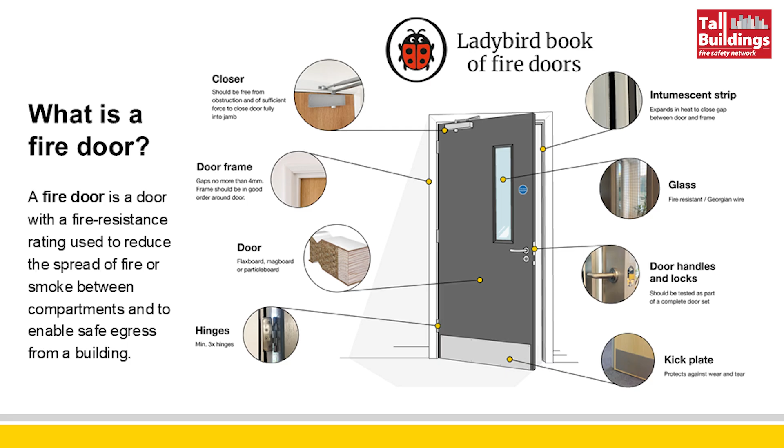However, I think we can probably also all agree that as an industry, we've got a very long way to go when it comes to making fire doors, which can often feel heavy and cumbersome to use, feel less like a barrier or a hurdle that needs to be overcome, especially within the context of social housing.

So as I say, non-functioning door closers, specifically on flat entrance doors, is a big problem within the social housing sector. And many of our customers have told us that between 30 and 45% of their housing stock suffer from these kinds of issues. And with door closers often being fitted on the internal face of the door or over the resident's threshold, it can often be a difficult problem to recognise and remedy.

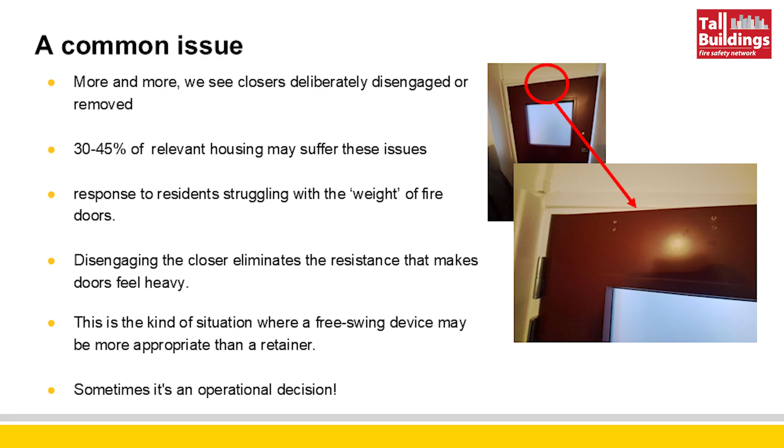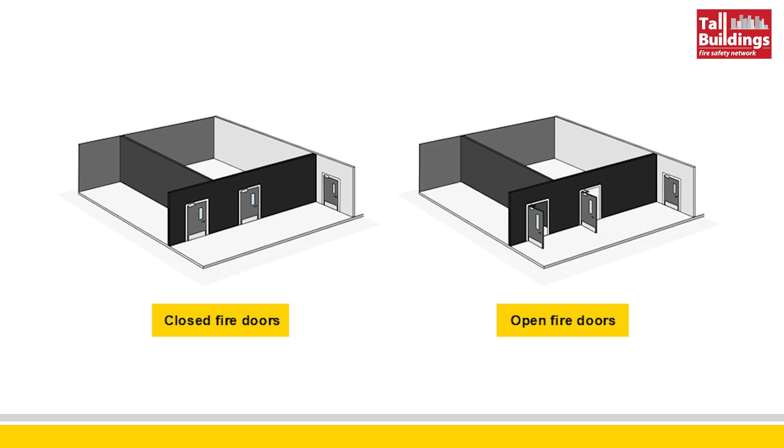So here's the good news. It's rarely a deliberate or malicious attempt to undermine sound fire safety strategy. Where residents take this kind of action, it's by and large not done out of malice, they're just trying to make their own lives easier. It is instead a symptom of a wider problem, and that is how heavy fire doors can appear.

And it could be easy to assume that it's just the elderly or people with mobility impairments that struggle with these kinds of problems, but fire doors don't discriminate. Fire doors are equal opportunity bullies. The bad news is that we can't place the blame for this problem solely on the shoulders of residents.

As Peter Apps identified in his book Show Me the Bodies, which explored the many failings that led to the Grenfell disaster, operational decisions and poor maintenance led to 77 out of 120 door closers in the block being non-functional. Despite many complaints from residents, despite the issues being identified in risk assessments, despite even an enforcement notice from London Fire Brigade, nothing was done to deal with the problem.

And whilst non-functioning door closers weren't the only problem at Grenfell, they certainly played a very big part in the internal fire spread.

And that is the problem, isn't it? A fire door that cannot self-close is no longer really a fire door, is it? It's just a big bit of wood flapping about in our compartmentation lines.

So as we saw in the Grenfell tragedy or in the fire at Twin Parks in the Bronx, New York City, where 17 people died in a stairwell after a fire spread from an apartment with a door that lacked a self-closing mechanism, doors not closing when they need to can be a major factor in fire spread. It's a critical issue in preventing fires from moving through a building.

It's likely that where we see or are made aware of deliberately disengaged door closers, a free swing device could be a better solution than a standard door closer. So I'm going to assume that most of the audience have an awareness of free swing devices. However, as BS 7273 Part 4, which we'll come on to later, makes little distinction between free swing and hold open devices, it's important to understand the difference, especially when considering how you want different doors in different types of building to perform.

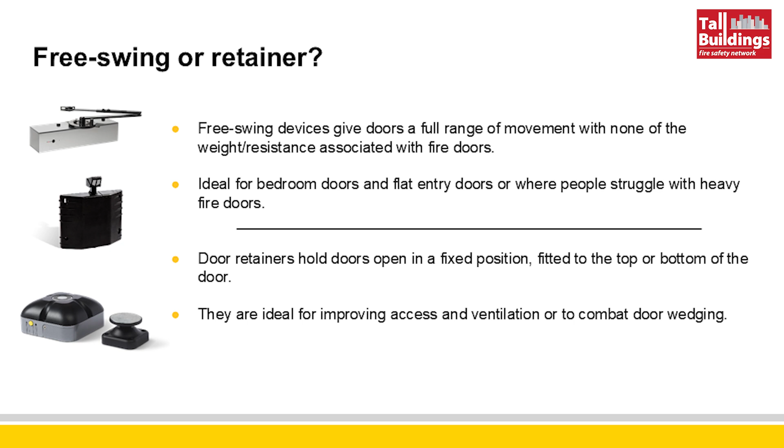However, in those circumstances where we're looking at bedroom doors in care homes or flat entrance doors in social housing, a hold open device is often unsuitable. In those instances, all we want is for a door to have a full range of movement on its hinges without any of the weight or resistance that we associate with automatic door closers.

So while some free swing devices do also have a hold open function, the most desirable feature is that doors fitted with these products can be opened and closed with little to no effort at all. And when the device receives the relevant fire signals, the free swing function is disengaged and the built-in closing mechanism shuts the door.

And of course, the method of actuation for free swing devices, the way in which the release mechanism is triggered, will vary depending on the nature of the building, the type of alarm system used, results of risk assessments, and of course, budgetary considerations. Many people still see fully cabled or hardwired systems as the only way to get complete compliance with the relevant guidance.

But with developments in technology, specifically radio frequency systems, this might not be the only way to achieve the desired level of compliance. By modern standards, many view the hardwiring process as a time-consuming, expensive and messy process. And it can have huge negative impact on occupants of a premises where sites are live or occupied by large amounts of people.

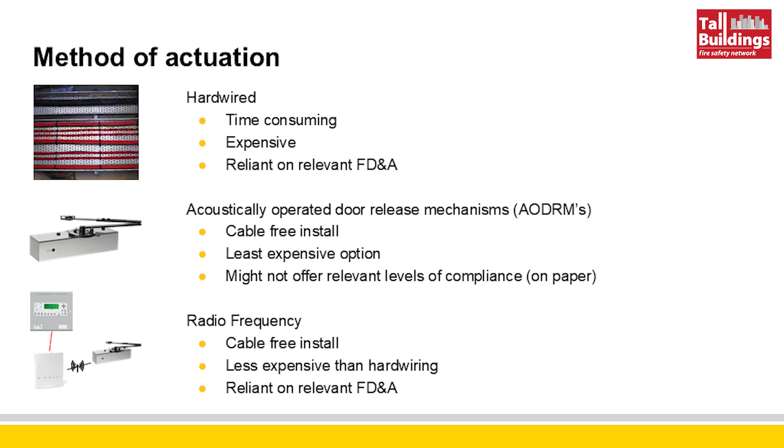Acoustically operated door release mechanisms, or AODRMs, rely on an audible signal, usually around 65 decibels, to release the mechanism. With improvements in sound filtering technology, these devices have become more reliable and offer a quick, cost-effective, easy solution. However, when we look at the guidance available, specifically in BS 7273 Part 4, these types of acoustic device might not offer the correct level of compliance in certain situations.

And then we have radio frequency systems. These bridge the gap beautifully between fully cabled and cable-free systems, operated via a hardwired radio transmitter, which can be integrated with relevant fire detection to form part of a critical system. Radio frequency devices offer all the benefits of a cable-free installation, whilst offering high levels of compliance compared to acoustic devices. Like fully cabled systems, radio frequency devices would be reliant on relevant levels of automatic fire detection being available.

So, free swing devices, they seem to be a reasonable way to deal with the symptoms that can cause residents to take matters into their own hands. But with the guidance saying that fire doors need to meet a specific level of compliance, it's tough, sometimes nearly impossible, especially in certain types of social housing, to achieve that level of compliance. And trying to reconcile guidance from British standards with the needs of the people we're trying to protect can feel like navigating a very tangled web of compliance. So does the fire industry know how to handle this paradox?

Well, before we go any further, I want to give you a very quick overview, and it will be a very quick overview, of BS 7273 Part 4. It's known for being a very tough standard to comply with, even in the best of circumstances. We'll also look at the type of automatic fire detection that's used commonly in social housing and how that can affect the type of solutions that you can use. However, there's a couple of key points that I need to cover first.

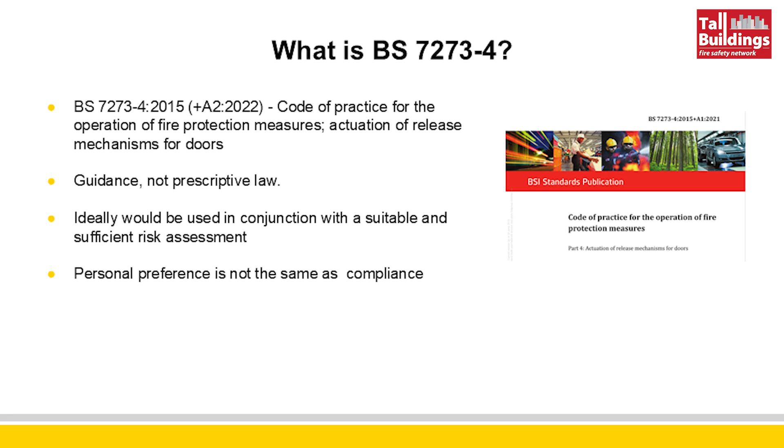But we do need to recognise that these documents are designed to be flexible. Fire safety should not be a tick box exercise where you try and shoehorn everything in to a specific standard. Sometimes we have to think outside of the box to solve specific problems on site. And this will be especially important when we look at solutions for disengaged door closers. So taking our lead from the Regulatory Reform Fire Safety Order, we promote a risk-assessed basis to choosing suitable hardware for keeping doors held open safely.

This allows a responsible person to really understand the nuances and idiosyncrasies of each different building to make a tailored solution for each situation. However, where this function is not performed, which is often, clause 4.1.4 of the standard recommends that the system is selected from the category of actuation in Annex B, Table B1. And whilst that offers a great framework and a compliant system on paper, it might not prove useful in some situations.

The final thing to consider before we move on is that a personal preference for a certain method of doing things does not mean that anything outside of that remit is non-compliant. It sounds really obvious when you say it out loud, but we often speak to customers who've been told that a way of doing something is non-compliant, when in reality it is compliant, but the person making that judgment has a tried and tested way of doing things that they prefer. This core tradition, which effectively says we've always done it this way, can prevent meaningful change from happening and can allow other larger risks to go unmitigated.

So, BS 7273 Part 4, one of the key things it does is classify systems into 3 different categories. It's important to note that the hold open device and its mechanism of release forms only part of the category of actuation, with the automatic fire detection forming the rest. This means that even fully hardwired or cabled systems might not achieve a critical level of compliance if the fire alarm panel is not capable of certain disablement features. So clause 4 of the standard gives us 3 categories of actuation: critical, standard and indirect, formerly category A, category B and category C respectively.

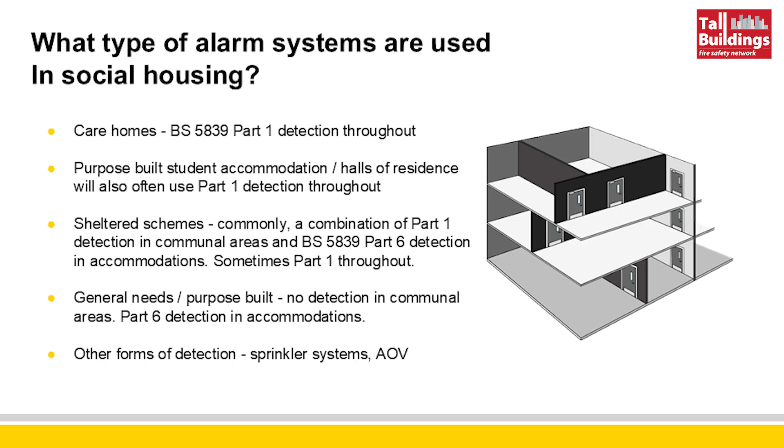So we have various types of social housing, and the level of automatic fire detection will depend on the nature of the building, with Part 1 systems in care homes and halls of residence, a mix of Part 1 and Part 6 systems in sheltered schemes, and then very often just Part 6 detection in general needs or purpose-built blocks of flats. So I just wanted to make it really, really clear what I'm talking about here when I'm talking about the level of automatic fire detection.

So this is a care home, this is a hotel, this is your student accommodation. You've got a Part 1 fire alarm system throughout. So chances are you've already got the right level of automatic fire detection to have a hardwired or radio free swing device fitted to a flat entrance door. You've got the level of compliance that the standard wants you to have. You don't need to worry about it.

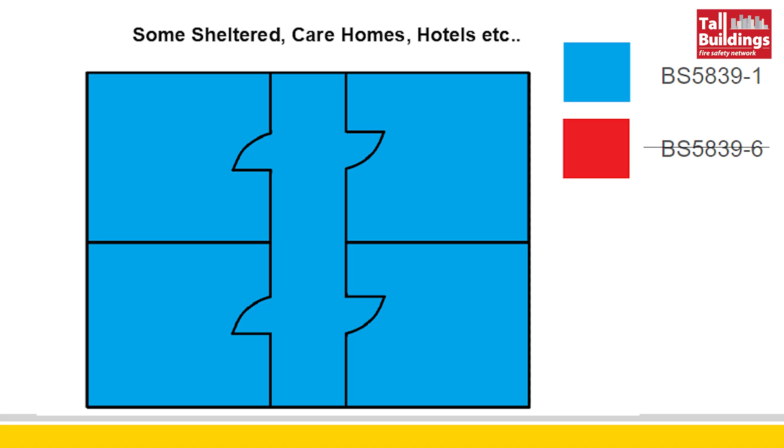In sheltered schemes, we often see either a mix of Part 1 detection throughout communal areas with Part 6 detection used in accommodations, and sometimes we see Part 1 throughout. Whilst not as straightforward as a care home environment, with some slight adaptations to automatic fire detection, it's likely that a critical level of compliance can still be achieved.

Additional Part 1 detectors can be installed in flats themselves solely as a means to actuate the free swing device, or also as a means to notify occupants of the premises to a fire, depending on the fire strategy used on site. While some schemes will have on-site staff during the day, residents will be left to evacuate themselves should a fire begin at night. So to ensure that the door is going to release behind them when they actually go out is vital.

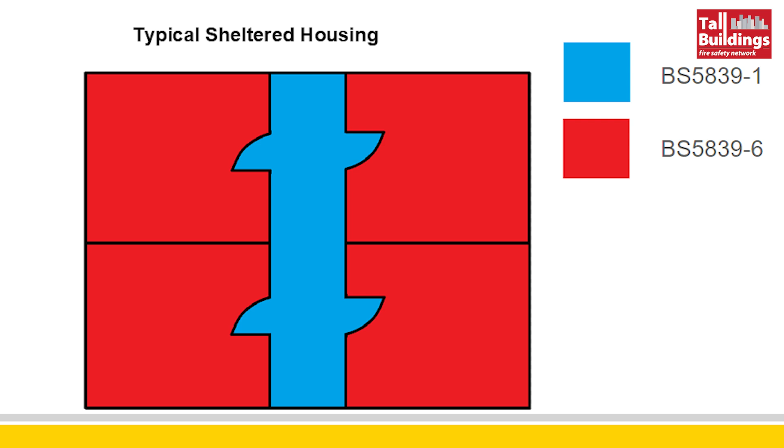But in general needs or purpose-built blocks, with some very rare exceptions, we tend to only see some Part 6 detectors in the flats themselves, with no communal or Part 1 fire alarm system to speak of. Now, this can be a major stumbling block when trying to deploy things like free swing devices in these environments. And this is the type of environment where the problem of non-functioning door closers tends to be most problematic and is the most difficult to solve.

Because without that communal or Part 1 detection available, you're never going to achieve the critical level of compliance that the British standard wants you to achieve. In an ideal world, we could link a Part 6 smoke detector directly to a free swing device, but as a manufacturer, we've been unable to find a single Part 6 detector on the market that will give the relevant disablement features that a critical system requires.

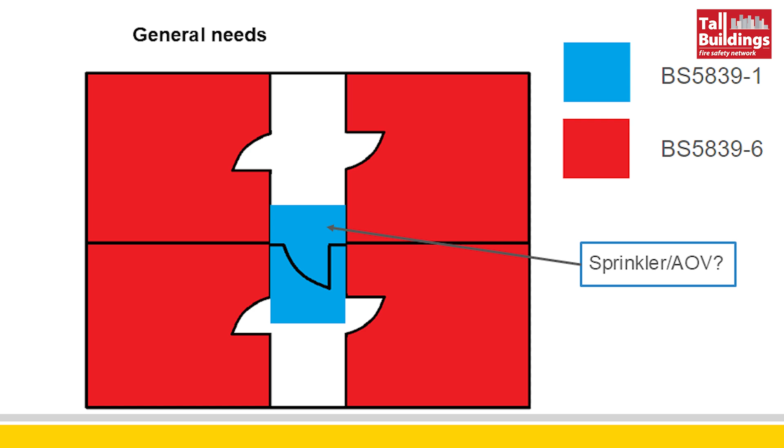Sometimes we see other forms of detection, so things like sprinklers and automatic opening vents. Where these types of system are employed, this could present an opportunity to use a radio or hardwired system. Invariably, some form of control and indicating equipment will still be used, which will likely have the relevant outputs, which you can use to instigate the release of door release mechanisms. Either way, unless you're prepared to think outside the box in these types of situations, trying to find a solution will be impossible, and that's possibly why the industry is struggling to deal with the problem.

So, we know that free swing devices can be more appropriate for dealing with the common issues that residents face, which lead them to tamper with door furniture. We know that under relevant guidance, devices fitted to flat entrance doors should form part of a critical system and require specific levels of automatic fire detection, which isn't widely available in general needs blocks of flats. So what do you do in situations where there is no automatic fire detection? Well, you can really only go so far as is reasonably practicable.

So far as is reasonably practicable is an important legal principle in UK health and safety legislation, including fire safety. It places a duty on employers, building owners or responsible persons to take measures to protect people from fire risks, but balances this requirement against what is considered reasonable in terms of cost, time and effort. In fire safety compliance, under the Regulatory Reform (Fire Safety) Order, those responsible for a building must implement necessary fire safety measures. The term "so far as is reasonably practicable" is applied when determining the extent of the fire safety measures themselves. The interpretation affects fire safety compliance in several ways.

It means that the responsible persons must take steps to reduce fire risks as much as possible, but not to an extreme or disproportionate degree. If the cost of reducing a risk is grossly disproportionate to the benefit gained in terms of reducing the risk of injury or death, it may not be deemed reasonably practicable. Under the Regulatory Reform Order, the key responsibility is conducting fire risk assessments which help identify the hazards and potential impact on occupants. The principle of "so far as is reasonably practicable" influences how the findings of this assessment are acted upon. It means that the steps taken must reflect a balance between the likelihood of a fire occurring and the measures necessary to mitigate it.

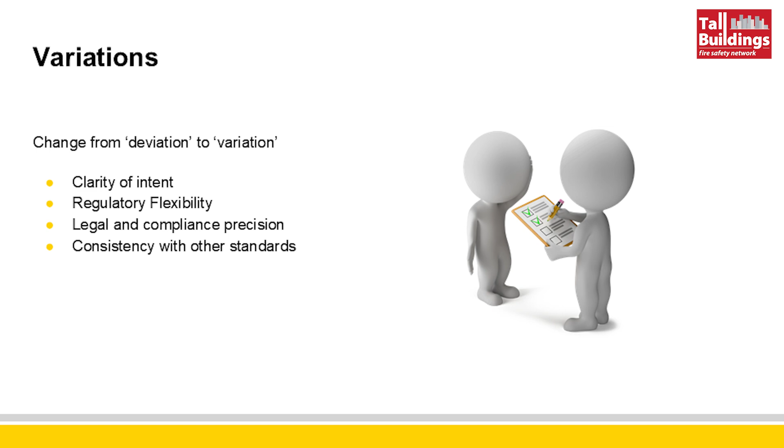Variation implies a deliberate and considered adjustment that still adheres to the overarching intent of the standard, but accommodates specific circumstances. It's less about breaking rules and more about structured, permissible modification, and allows for greater flexibility within the framework of the standard itself. This indicates that while the core principles of safety and function remain intact, there's room to adapt the approach based on individual building or system needs.

And this also makes sense from a legal perspective. In some regulatory contexts, deviation might suggest non-compliance, which could have legal or insurance implications. Changing the term to variation avoids this potential issue and aligns with standards that allow documented, justified and approved changes to recommendations. So BS 7273 Part 4 Clause 6 lays out the requirements for variations in its own standard.

Whilst this is not a get-out-of-jail-free card for non-compliances, variations can be applied if a suitable risk assessment has been completed. And this goes back to what I was saying about fire safety not being a tick-box exercise. You actually have to assess the risk, right? Variations should be detailed in the specification or noted on the commissioning certificate during installation.

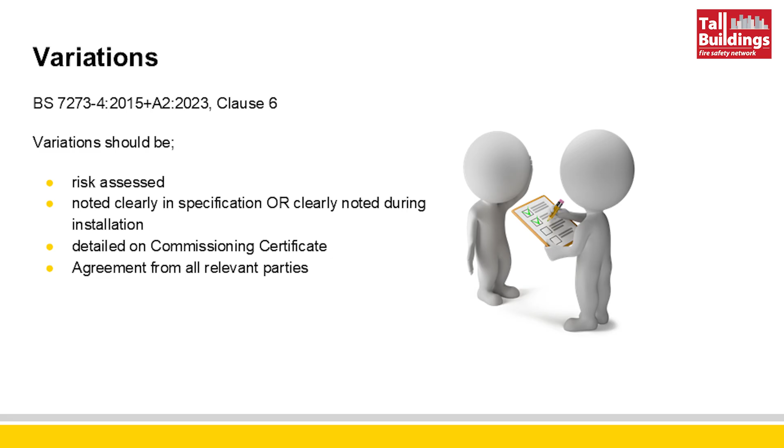And variations have to be agreed upon by all interested parties. That includes the resident, leaseholders, premises managers, local fire and rescue services, primary care authorities. Everyone that has got an involvement in the fire safety in that building needs to be involved in that decision to use variation. So what's important here is that last bullet point really, is agreement from all relevant parties.

Your local authority for fire will need to be involved in the process. They'll probably be aware of the risk already, so they understand the risks that you're trying to mitigate and the rationale behind it. And it's also vital that when dealing with flat entrance doors, the resident is also aware of what's happening. Without this consensus, the variation won't be compliant. So I just wanted to give you a few examples of where variations may be deemed appropriate.

So Mr. Jones, he's lived in his flat on the 9th floor for over 40 years. His kids have grown up there. His wife passed away there. He now lives there on his own, and he's unwilling to consider moving because of the strong sentimental attachment he has to his home. Mr. Jones struggles on a daily basis to get into his flat, but because there is no automatic fire detection, as far as the responsible person is concerned, there isn't a solution that they can deploy in the building that would be compliant.

So eventually Mr. Jones, whose son is a carpenter, has his son disconnect the arm on the door closer itself. Hey presto, Mr. Jones's daily struggles are over. He can get in and out of his flat. Unfortunately, he has made that door non-compliant.

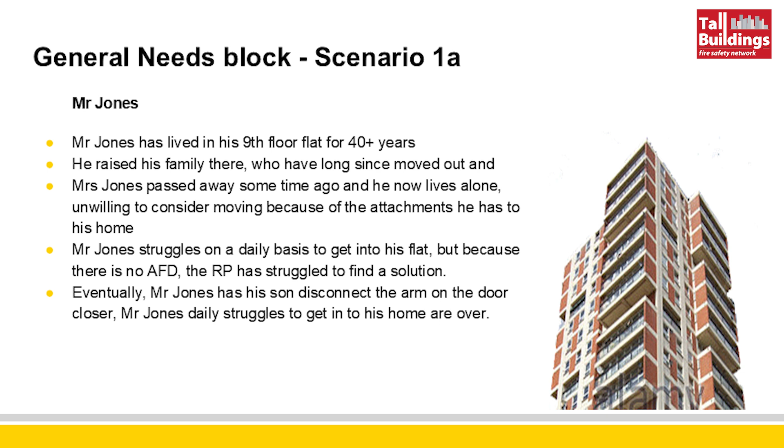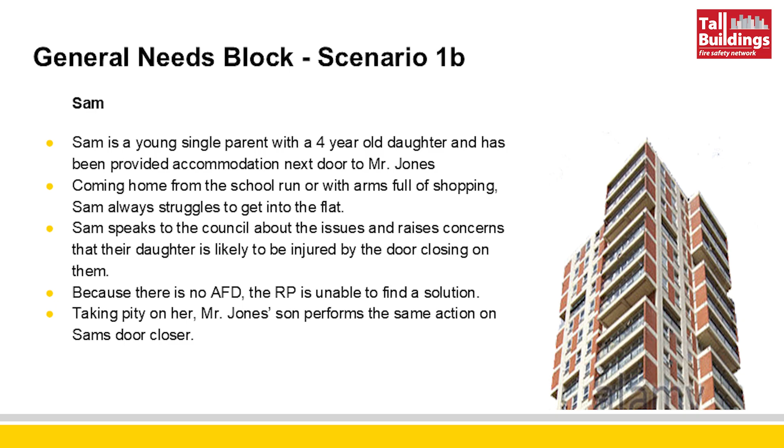So taking pity on her, Mr. Jones's son does the same action he did for his dad, disengages the arm on the door closer, and hey presto, Sam and her kids can get in and out of the flat, no worries. But it's not just general needs where we see this. We do sometimes see this problem in sheltered housing.

So you might have residents in sheltered schemes that have conditions that would preclude them from easily operating a fire door. And because there's no staff on site overnight, the resident will find it very difficult to get in and out of their flat. And again, out comes the family member, the ratchet set, off comes the arm on the door, hey presto, in and out, no problem. Again though, the door is non-compliant.

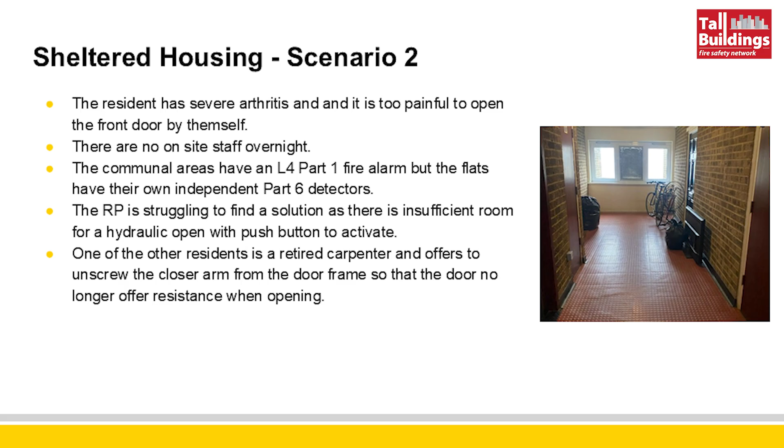This would be slightly easier to deal with to get a critical system. As I say, you could adapt the control and indicating equipment if it's deemed reasonably practicable. More often than not, it won't be, because budgets are going to be very tight with these types of property. So again, a variation to the recommendations of the standard could deal with all three of these scenarios. In the first two scenarios, as I say, the main obstacle is that lack of automatic fire detection. With no Part 1 system installed, it's just going to be impossible to get that critical level of compliance that the guidance tells you you need.

And, as I say, it's likely that installing an L5 automatic fire detection, which is what you'd need, would be not reasonably practicable. In the second scenario, the key issue is that the automatic fire detection to form a critical system is, again, not reasonably practicable. So a variation to the recommendations of this standard could reasonably be applied here. And perhaps instead of looking at a hardwired product, you could look at an acoustic device, tested, commissioned, and working with the Part 6 detection in the flat itself.

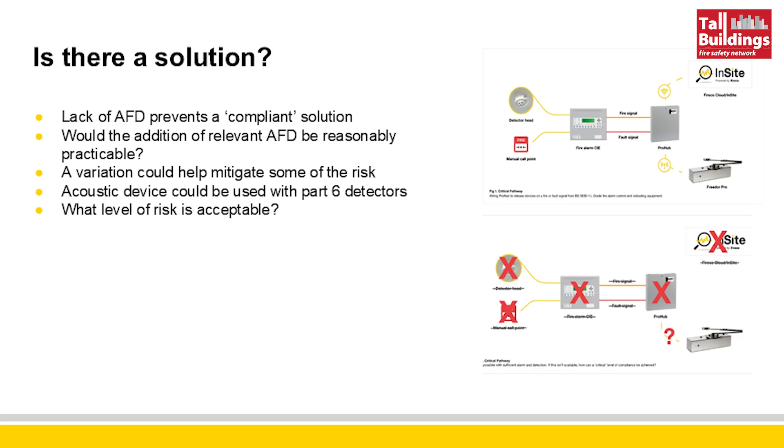But again, unless the responsible person actually does the footwork and looks at what the standard is saying about variations, if they assume the only way to deal with this is to have a critical system, then they're just not going to deal with the problem, and they're just going to constantly bang their head against the fire door as they tell the resident that they can't disengage the door closer, and they'll do that over and over again. Remember, the resident just wants to get into his flat. He's not that bothered about whether his door is non-compliant. So variations can offer a tangible, effective way of empowering residents to be able to get in and out of their flats on a regular basis.

There's some other things to consider, of course, with these types of solutions. Maintenance. There's very little maintenance for an acoustic device as there is for a hardwired product. There's only one more thing you have to do for it. Can anyone guess what that is on an acoustic product? Deadly quiet. So with acoustic devices, you're going to have to change batteries every so often. Other than that, the testing regime for them is exactly the same as it is for hardwired products. You've got to test them once a week. You've got to report any logs in your fire alarm logbook, inspect them at 6 monthly intervals to make sure they're not falling off the door, change batteries every 12 months. In a nutshell, that's it. So there's not much more you need to do for wire-free as you do for hardwired.

Testing, obviously, that's very important as well. So you want to be looking at EN 1155 or EN 1154. You also want to be looking at your BS EN 1634 burn testing. Make sure you've got relevant global test evidence or test evidence for specific tests with door manufacturers, so that putting that device on your nice shiny new door set isn't going to compromise the door's performance, and it's not going to allow fire to get through the door any quicker.

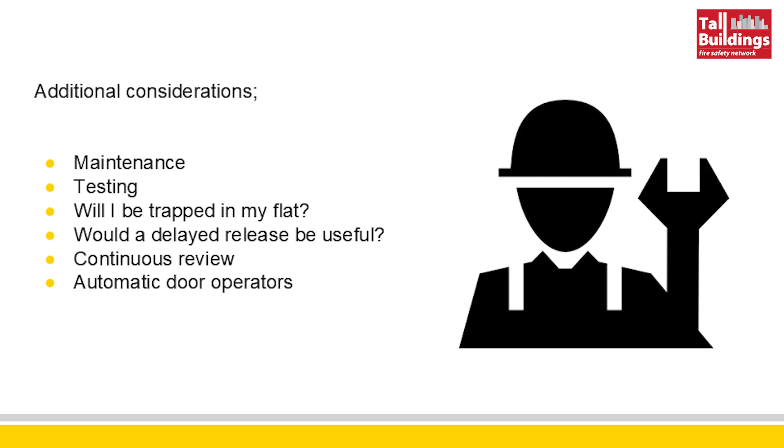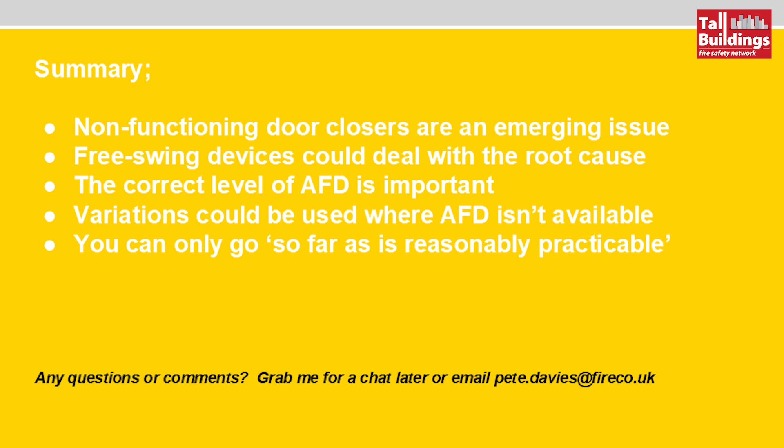So hopefully this has given you some ideas to take away. Hopefully it's demonstrated some of the potential solutions that you can apply to these issues of non-functioning door closers if you're prepared to do the work and put a variation in place where it needs to be. And look, let's be honest, in most buildings you wouldn't need to look at variation because you're going to have relevant automatic fire detection present. But where you don't, a variation is a very good way of dealing with those issues very, very easily.